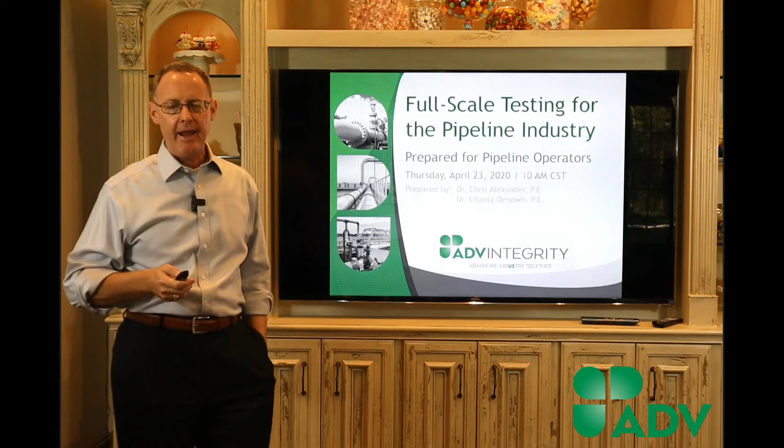We're here to talk about full-scale testing. Here's how we'll run through this: I'm going to open with a few deep thoughts - those of you that know me know I'm a little sarcastic, have to watch that here at home. I'll talk about a concept we have called ICAD and how testing can work with integrity management. We'll spend a lot of time on the goals in testing, really trying to help you understand how testing as an operator can work with you in your integrity management efforts.

Most of you on the call today are operators - that was intentional. We've got a call this afternoon, so today's operator day. Next week we'll probably open it up to a lot of technology companies and have a larger group.

This live stream thing, I'm hoping it's working, because it'll allow us to reach a larger audience. My daughter Ashley, who's at A&M, is manning the booth for us today, and if it wasn't for her we wouldn't be able to do this. Since you all can't come out to Waller and see us, we're having a simulated lab tour, so I've got some photos of what we're doing. We've got guys working today doing testing and repairing samples and those kinds of things.

One of the things I like to do whenever I present is talk about case studies, sometimes we call them war stories. We'll talk a little bit - I've got four of them. I could talk for hours.

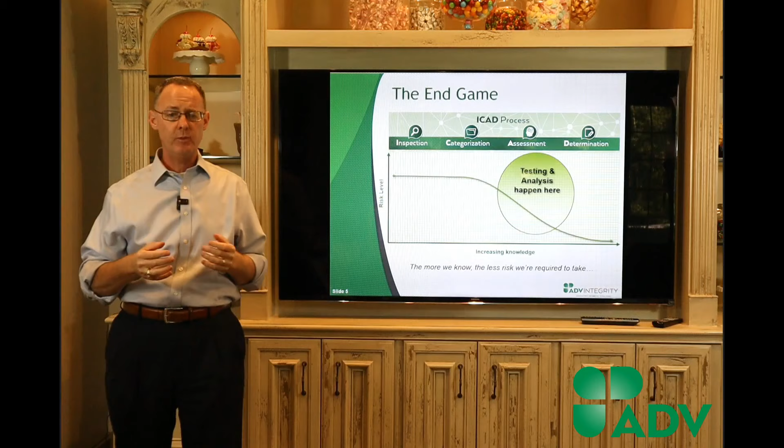So what happens is, you know, you look at my curve, I feel like I'm talking about the weather here, but you look at the trend that goes down, that's the world that we live in. That's the assessment. We have other companies in some sense that we compete with. I want to be Switzerland and get along with everybody, but you've got folks like Ted Anderson, who's certainly the well-recognized fracture mechanics person, Sergio Limon. You've got the modeling side of it, and you do FEA modeling. There's a lot of companies that do that. We even do that. So you can do the modeling side of it. Why we're here today, though, is to talk about the full-scale testing part.

So what happens is, the more I know, if you look at that tagline on the bottom, the more that we know, the less risk we're required to take. So what happens is my knowledge increases with information from models, information from testing. I'm able to take a higher level of risk because I understand more about how that pipe's going to behave. And then I get all the way, so we got ICAD, I'm going through I, C, we've talked about assessment that involves modeling and testing. And at the very end, I determine what I'm going to do.

I've spent most of my life working in the CAD side, okay? And I'm learning a lot more about the I. That's the fun thing about engineering. Even at 51 years old, I feel like I'm still learning like I did when I was a younger engineer.

I just got a little more gray hair to go along with the learning process. But the last part is the determination. And it's not overly complicated because we don't have an infinite number of options available to us.

One of the options we have is we can leave it in service. To a large extent, I think there are a lot of features as an industry that we go out and look at that, if we knew more about how they really were going to perform, we might not even go look at those. One of my goals, and I realize right now with the price of oil hovering around zero, which is unbelievable, I feel like I'm in a bad movie sometimes with a lot of things right now, but we need to be very efficient.

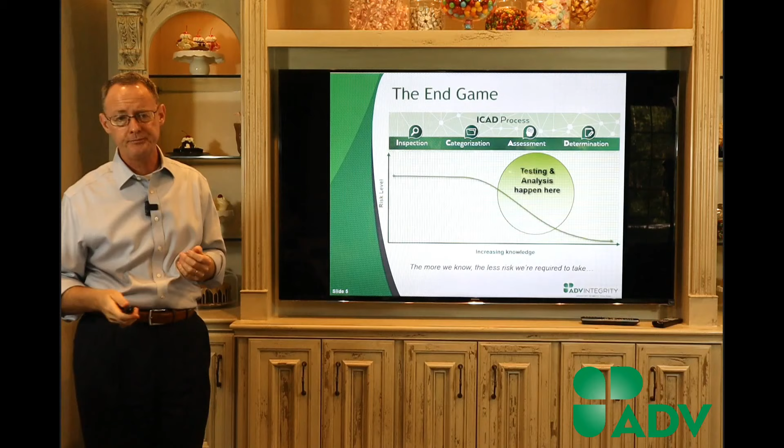We're continuing to do things in terms of leak repair and reinforcing cracks that 10 years ago we weren't even talking about. So we've got a lot of options on this determination side that we can explore, and we're going to talk about some of those today as well. So hopefully no one's fallen asleep yet, it's a little early this morning.

So this is the goal in testing. There's a lot of text on here, okay? And the goal is not just to destructively test things and blow it up. Although I'll admit it's an exciting day to come in, and we blew a couple of samples up yesterday, a lot of energy.

We're going to talk about safety. Safety is a huge thing for all of us. The pipeline industry, we eat, sleep, and breathe safety. It's one thing to operate a pipeline safely, but those of you who've been in our test lab, if you were there when we're doing a destructive test, we spend a lot of time thinking about containment and safety and energy levels in a way that I don't think a lot of the industry really has exposure to.

So I've got two equations, and we'll talk about those here in a minute. The goal in testing is not just to test stuff. And as someone who likes to test, it's easy for me to get excited about it, but I realize I'm not the wheel or the gear, I'm just a cog.

Our goal is to make the models very, very effective. So this last one here, very simply, the goal in testing is to help you more effectively make integrity and operational decisions. So if our models are great, then we can control our risk and we can go do things.

So I kind of made a list, and we'll make this PowerPoint available for you. I know I'm going to follow up with some of you, and we'll talk about these things. As I've kind of been preparing for the past couple of weeks, I thought about what does this process look like? So the first thing that you do, and as operators, this is the world you live in: you run your tools, and you identify that you've got features of interest.

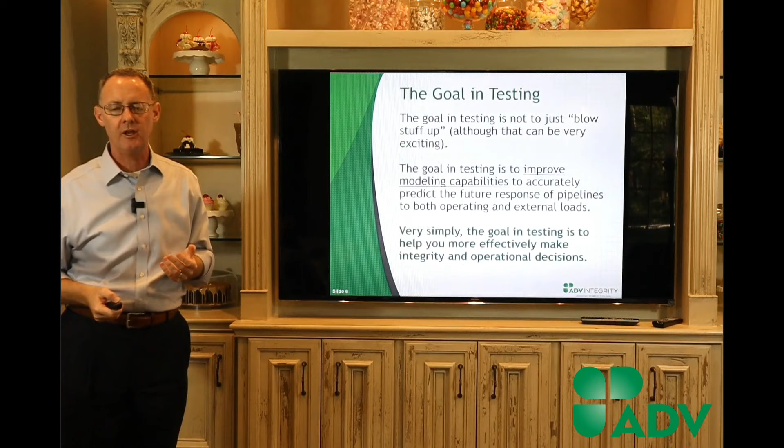So much of our life on the testing side involves a group of engineers and technicians getting together in a room and just running over different scenarios. For a really big test, we spend a lot of time planning things. And this second bullet is super important.

I'll admit, I'm president of ADV, but we've got a team of people that we trust each other. I lean very heavily on Corey Duncan, our lab manager, and Chantz Denowh, our senior engineer, and I really rely on their expertise. Before we do anything, we have a lot of discussion. This second bullet is really where the rubber meets the road.

Then we've got a choice between whether we're going to be creating features—putting a dent in a pipe, an EDM notch to simulate or start a crack—or whether you provide us features that have been removed from the field. That's a big decision. It's very difficult and expensive to get features, and sometimes you don't get what you want.

So we spend a lot of time in the lab simulating and creating defects, and in our case studies you will see that we do a lot of that. Then you've got to figure out what the loads are.

For the most part it's relatively easy to test pipe because we're looking at pressure. But every now and then you get a situation where you need to put on a tension load, or you may need to apply a bending load, and sometimes we have to build frames in order to do those things. Then we design the test program.

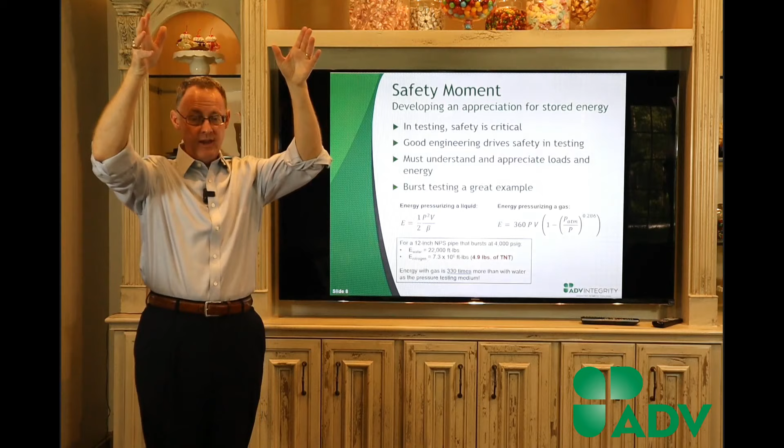It's why when we're lifting things, we don't stand underneath them. Because even if you take 50 pounds and drop it from 20 feet, that's a lot of energy. So that gives you a context of what we're talking about.

Now the reason we're doing this is, what's the difference between liquid and gas? Probably half of you on this call are gas operators and understand the energy associated with a gas pipeline failure. So the equation you have to use for gas, if you remember this from thermodynamics—and most of you probably, like me, have forgotten a lot of it, I was glad to do that, it was not my favorite stuff in school—you run through this and it's the same basic equations. But the reason gas has so much more energy is it's compressible. You know this if you've blown up a balloon or aired a tire. Gas can be compressed in a way that liquid can't.

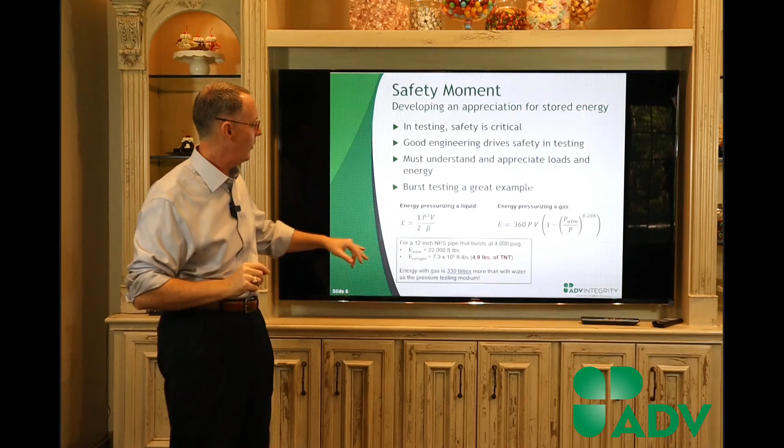So what happens is you keep putting a lot more energy into that, and that energy is stored. For the same basic test we did yesterday, where we were at about 20,000 foot-pounds, if we had done that with gas we would have blown our building up. That's got about 5 pounds of TNT, and I think a pound of TNT is 1.5 million foot-pounds of energy, so it's a little easier to picture. Not that I've ever blown stuff up with TNT, but that gives you some context.

So that's our safety moment.

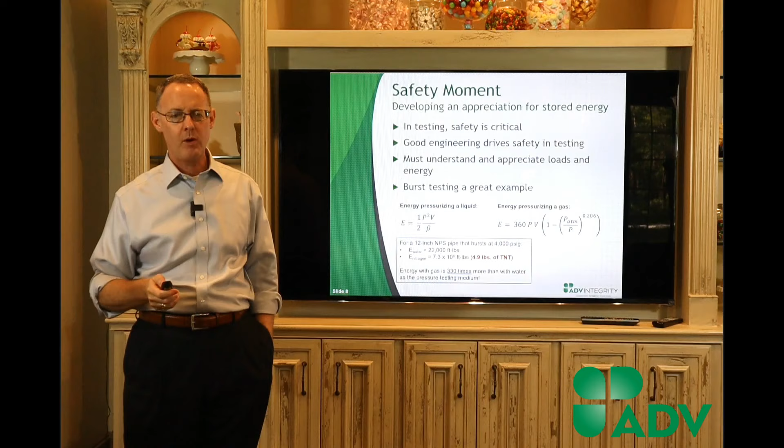A little math—if you got kids at home right now, you're probably having to help them with math homework, and you probably realize our teachers all need to get a raise next year because we're having to do stuff we haven't done in a long time.

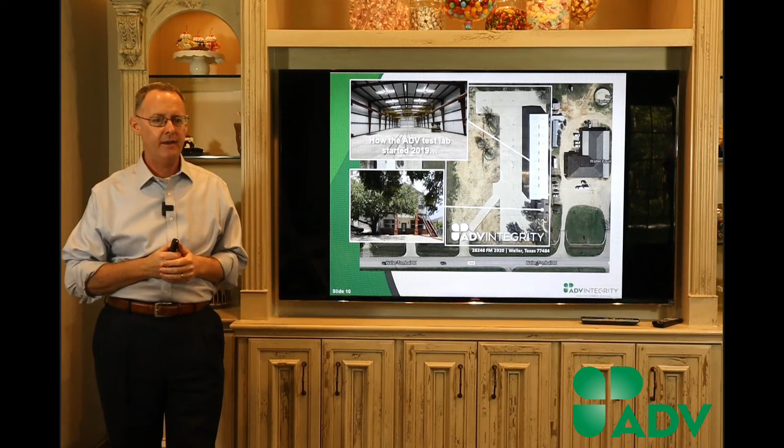Because we can't go to Waller and you can't come out to see us, we're going to do a virtual lab tour. I love some of these photos, and one I really like is this top left one. We leased a building back in October of 2018, and it was kind of Corey and Wendy and I and a technician, then Chantz Denowh and John Rickert came on. So when we started in 2019, this is what it looked like. I don't have a picture of it today.

You'll see some images on the inside—it is completely filled up. We're trying to figure out how we can move things around all the time. For me it's kind of exciting to have started a business and just to see how it's grown, and I think we've had a lot of fun. A lot of you on the call today, you're the reason we've been able to grow this business.

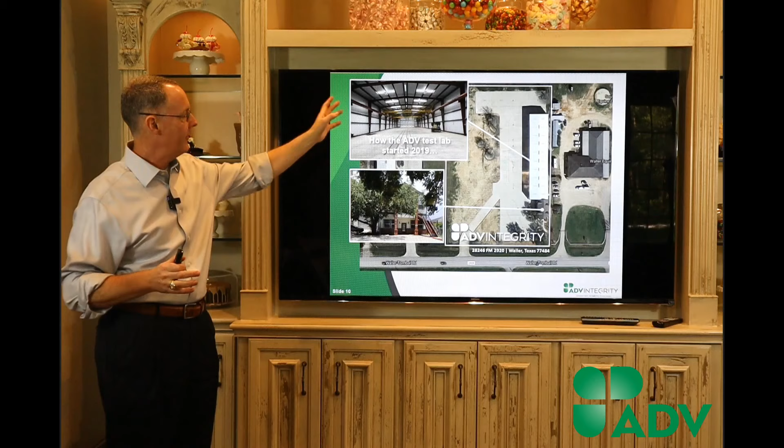We've got about 4 acres—I think I got this off Google Earth, and you can see we've got a lot of area. Back in the back, Rosen has loaned us their pull rig, so we've been working on a project pulling some things. We've got a grassy area where we can bury things; we did a project for TC Energy where we buried some composite samples in the ground. We've got room to do stuff, and when you're doing testing you really need room—you can't just do things in a small office building. So it served its purpose well.

One of the first things we had to do, since we're doing pressure testing, was figure out where we were going to do these things. When we moved into our building, there was an area inside where we looked at possibly putting some pits in. Those of you who've been around a while know you've got a couple of options: you either contain it above ground or in the ground. After some debate, we decided it was better to build an above-ground bunker. So this is our box, our containment box.

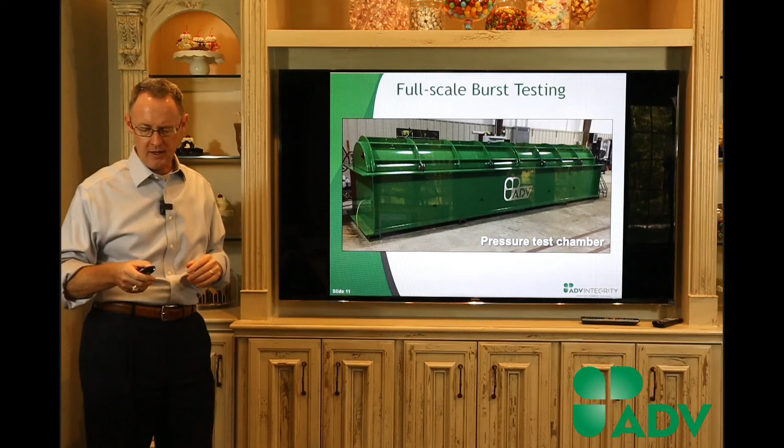We basically pressurize. I think the largest sample we've done is 36-inch diameter, about 25 feet long. So we've got the capacity to do this. If we need to get into longer samples, we can build a bigger box. But for the vast majority of what we've done, we've been able to do it. We've had some pretty high energy levels in there, and we spent a lot of time running calculations. Corey Duncan did a great job designing this, and it's worked very well for us.

One of the other things I talked about earlier, the vast majority of what we do, probably 90 to 95%, just involves pressure. So we're pressurizing samples, we're pressure cycling, but on occasion we're asked about putting external loads. We've got a project right now with PRCI looking at large standoff magnetometry. We're going to build a facility outside that's about 120 feet long, and we're going to displace the pipe to simulate land movement so the LSM technology can go over the pipe and look for displacements and stresses.

So we had two projects early last year where the operator said, look, we need to put some bending loads. One was looking at girth welds, another was looking at wrinkle bends. So in our world, we're starting with a blank whiteboard, and we're like, okay, let's design and build a load frame. Corey and Chantz are primarily the brains behind this, and basically we have an I-beam.

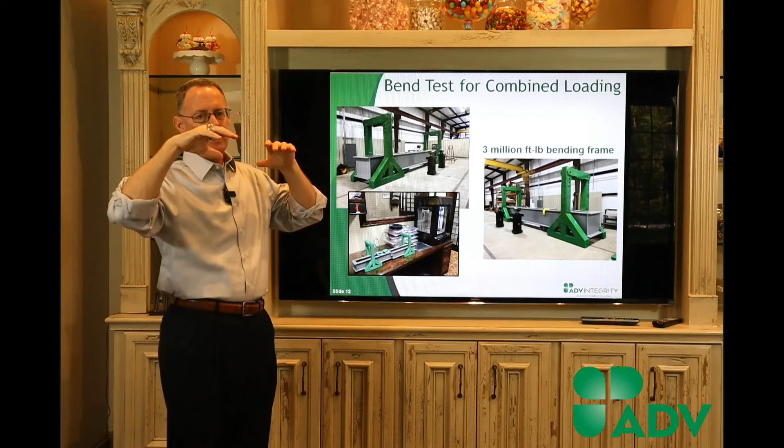I love Corey's design because we've got two I-beams, and we drop the cylinders in the middle. What happens is it keeps the sample relatively low. A lot of the work I did before in other places, you lift the sample way high in the air, and it's more of a safety hazard. So I like Corey's design. You load the sample in between these two cylinders. These cylinders will do about 460,000 pounds each.

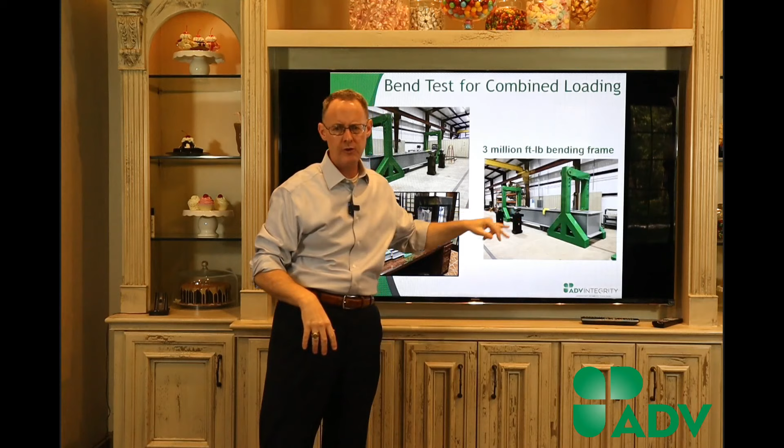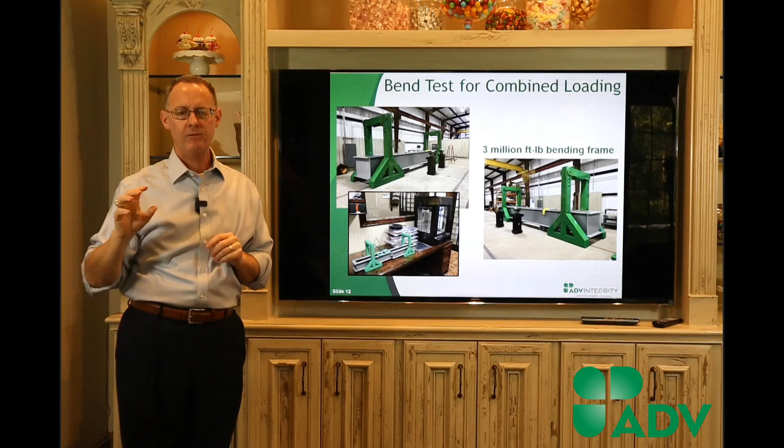We displace it. Chantz wrote a little algorithm. We can actually do fatigue loading. So if you've got a situation where you're concerned about the pipe moving back and forth, Chantz and our technicians have got a program where we can simulate that displacement. A lot of times it's a little bit more money to look at fatigue, but the benefits you get looking long term are extremely valuable.

I had to stick this photo in here. I'm kind of a kid at heart, I love toys, and we've got a 3D printer, and a couple of our guys have gotten really good at using it. So Corey 3D printed a model of our load frame. Once we get out of the house and go to shows, we'll bring that with us. It's kind of hard to load this thing up in the back of a pickup truck, but we can take the model with us and people can see it.

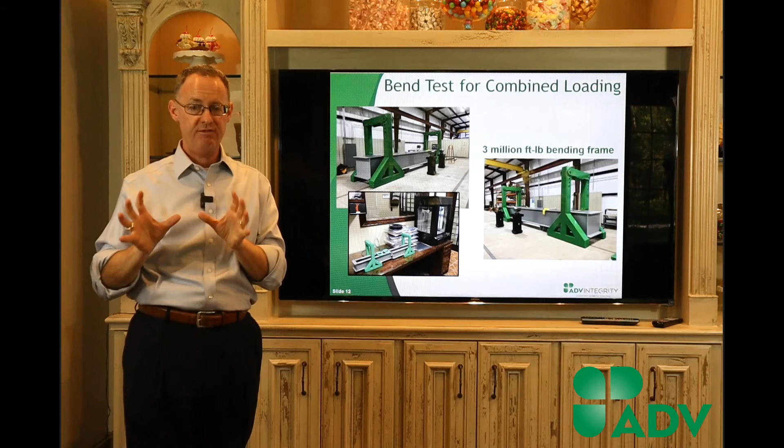The other thing about the 3D printer, a little plug for where I see things going. Atul Ganpatye started with us - I feel like he's been with us for a couple of years, but he started in February. There's an area called additive manufacturing where we're as an industry really looking at manufacturing pieces using a 3D printing process, doing it with metals. I'm really excited, that's kind of a forward-thinking concept that we're looking at.

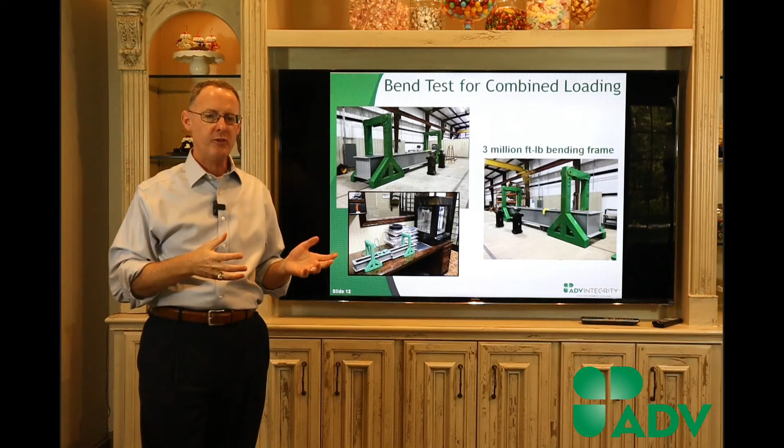The other thing I like is sometimes in the lab you need to build a little bracket to hold this or that. Historically, you'd go out and bend some steel or make it out of wood. Now the guys just design it in SolidWorks, fire it into the 3D printer, and print it out. It's got threads in it. So I've been really impressed with how our engineers and technicians have been able to use that 3D printer to basically make things that we use in the lab.

So one of the things that we've done, we did a project earlier this year, and I want you to think about this for a minute: minus 51 degrees Fahrenheit. That is really cold. We live here in Houston, and when it gets much below about 60, I start getting cold. So when you get to minus 51, that's really cold.

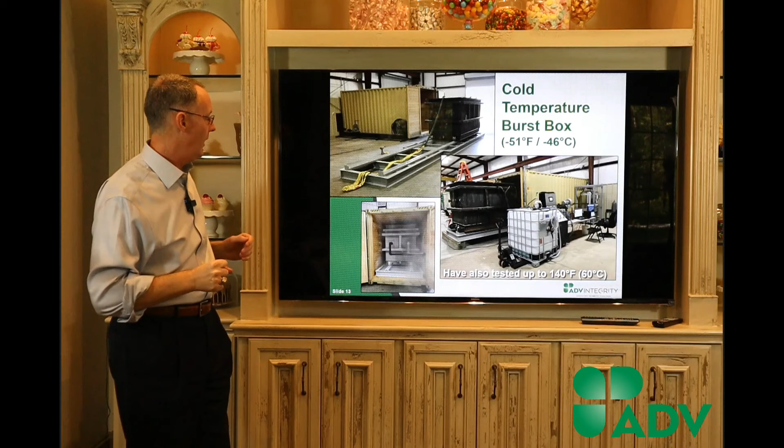We needed to do a pressure test, so Corey designed for us a box, and he and Chantz got together and figured out how to build this box to cool it down. I took a photo as we were opening a box. We basically insulated a Conex container. This box here does all the structural reinforcement. We slide it out, it's on rails, and we load the sample in there.

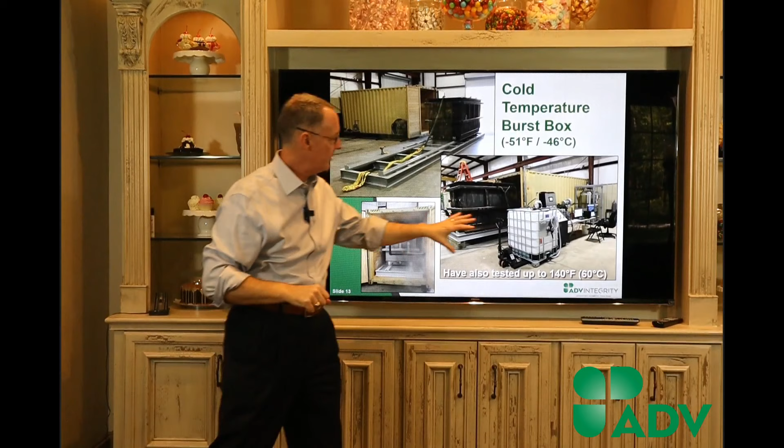We've got a box that has a lid, we bolt the lid down, we slide everything in. And then all of this equipment here, okay, liquid nitrogen, we've got a large tank, we start cooling samples down. I was really impressed with how everything came together.

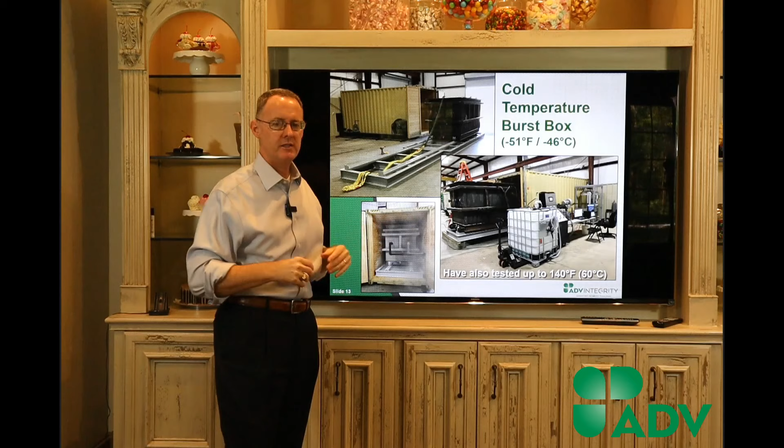I talked about earlier safety. One of the things we do when we design structures for containment, we want to make sure they can withstand the energy levels. And as you can see, it's a big box. It has the capacity to absorb a lot of energy, and then we have the ability to slide this thing in there and cool it.

We've also run some elevated temperature tests. I've got a little note here, we test a composite up to 60 C, so we got a pretty wide range. We can go higher than that, but most of the reason we're doing any elevated temperature work is to focus on the composite repair technology. So that kind of gives you an idea of our overall capacity.

One of the things I've enjoyed doing, those of you that know me know I love joint industry programs. I kind of keep a running tally, I think I've done about 20 JIPs. The very first one I did was back about 15 years ago on my PhD, and we get a lot of industry leaders and thought leaders together, and we get technology companies.

The next slide I'll show you kind of what it looks like. We started this project around December of 2018. Had a meeting here in Houston, got a group of people together, kind of framed out what the test program was going to be, and it's been wildly successful. I was hoping that we'd have 3 or 4 operators and 3 or 4 manufacturers. I think last count we had 6 operators and 8 technology companies. It's really grown, we've really learned a lot. Earlier this week we were doing some burst tests, and things are looking really good for these technologies.

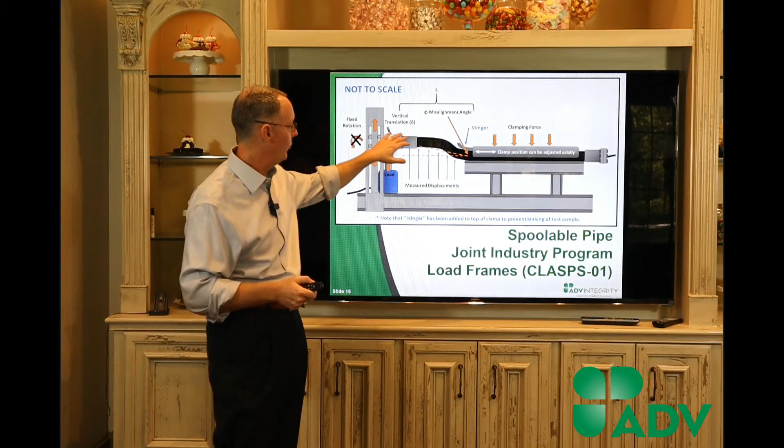This is kind of a little schematic of what our system looks like. We take the spoolable pipe and displace it vertically, putting a bending moment on this connector section. We basically pressurize them for 1,000 hours, do 100,000 pressure cycles, and then if they survive, we'll do a burst test.

This is information that we've actually presented at the API 15S meeting. If you're interested in learning more about this, please reach out to me, and we'd be glad to visit with you. But as I said, it's a great example of industry working together.

The power of JIPs is a couple things. One is you get a lot of good thought leaders within the technology companies and the operators, and when you get a lot of really smart people, you're going to come up with some really good concepts. Now, I will admit, as someone who's organized a lot of JIPs, it's challenging at times to manage them because you've got a lot of smart people, and smart people have opinions. We certainly know today there's lots of opinions floating around. Well, engineers also have opinions. So there's some psychology involved in us all figuring out how to work together.

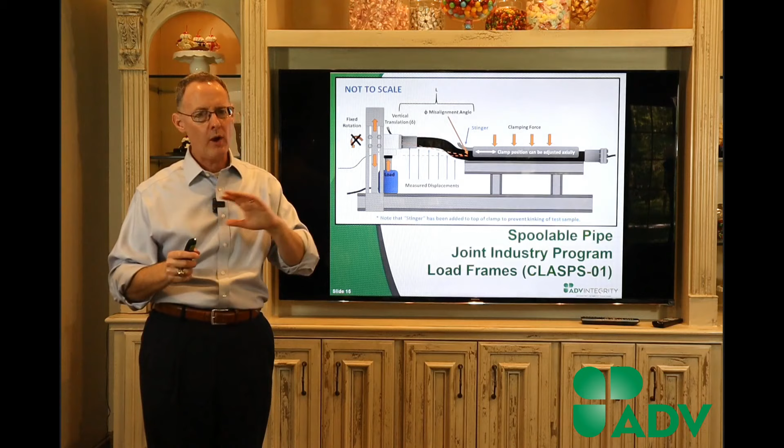It's a great opportunity for technology companies to showcase their technologies and demonstrate what they can do. With the price of oil where it is, we're going to be very cost conscious. So you can come into a problem or challenge with only $50,000. You call us, we work with you, we go out to industry, and that $50,000 can become a $500,000 JIP. I think even folks on Wall Street would like that kind of return on investment. It's a great way to solve challenging problems in an economic fashion.

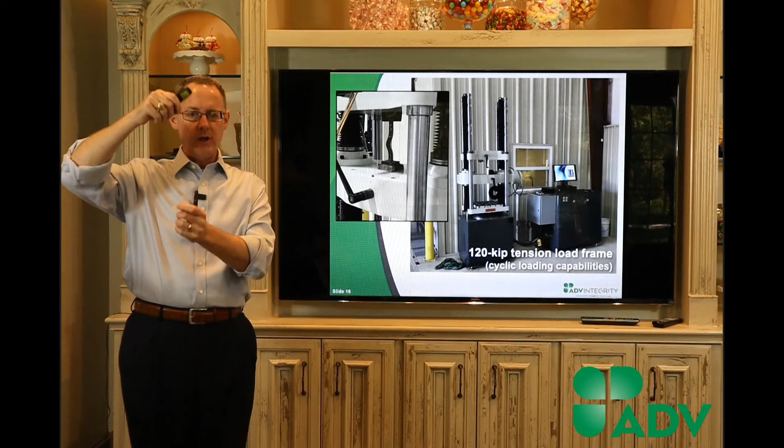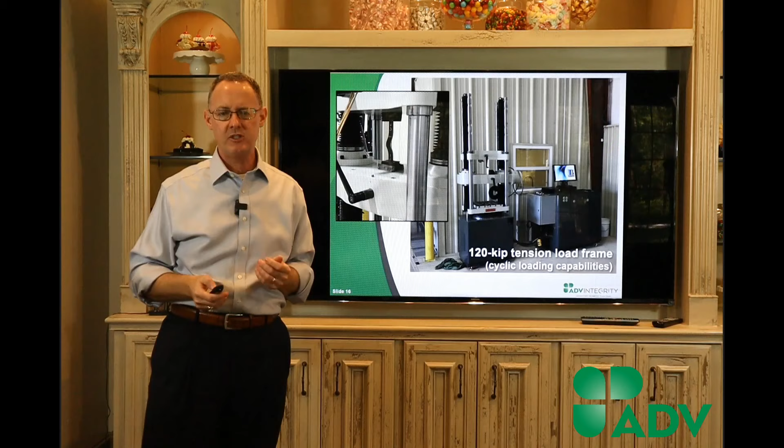One of the other things we did, and I'll admit when we started in 2019 I did not think we would do this, but we bought a little Tinius Olsen machine. It'll do about 120,000 pounds and it will do cyclic loading. This year I want to do work with a company doing composite work, to do some fatigue testing on composite materials. It's relatively automated, but we can also do tensile samples. This is actually a wrinkle bend where we're doing some high strain, low cycle wrinkle bend testing that has worked out really well. That's just an example of the kind of things we can do. The nice thing is if we need to do a quick pull test, we've got the facility to do it and don't have to wait to send it out.

One of the first areas I got involved in the oil industry in 1993 was looking at dents. I'll admit, when I was at A&M, I had no idea what a big problem dents were in the pipeline industry. There's a lot of work, some great work that's been done by PRCI looking at dents. It's a big part of our industry. Everybody has dents. How do you assess them?

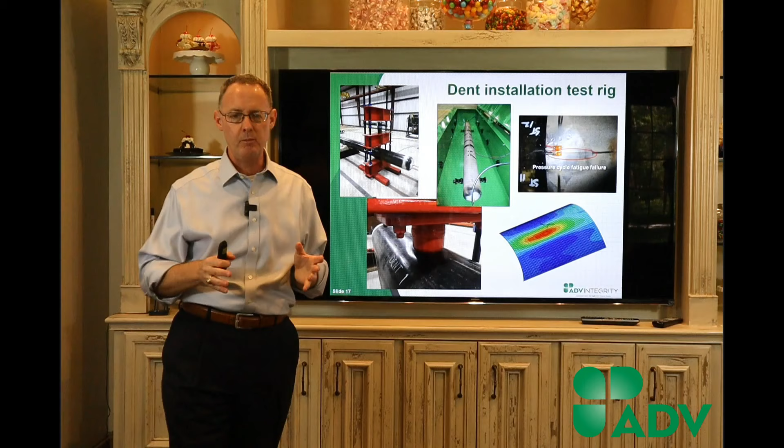So we've got a little rig. This is the small dent frame, and we have a large dent frame. We can dent pipe up to 36 inches. And we basically put a dent in.

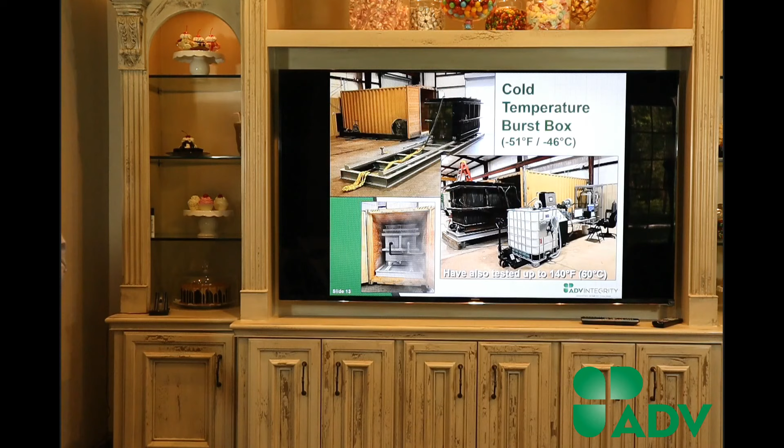Okay, here we go. So I was talking about dents. We've done a lot of dents over the years and we've learned a lot, but the interesting thing is we're continuing to learn more. We'll put a strain gauge on it and measure the strain. This is actually a fatigue failure that we get. If you know anything about dents, plain dents, the reason it fails is due to fatigue and cycling. If we were to do a burst test on it, the first thing that happens is we basically just pop that dent out. So we're going to continue to do more. What makes dents often damaging is the interaction with mechanical damage.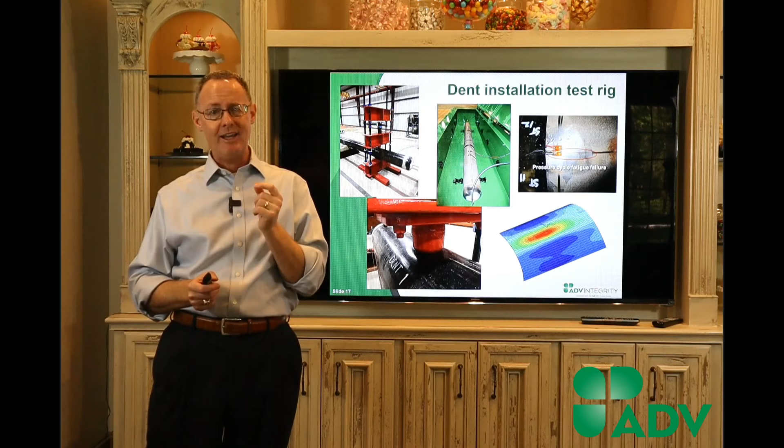Sometimes we just build things. We'll take an LVDT and hook it up, and it allows us to measure displacement or rotation. There's a lot of creativity that goes into that.

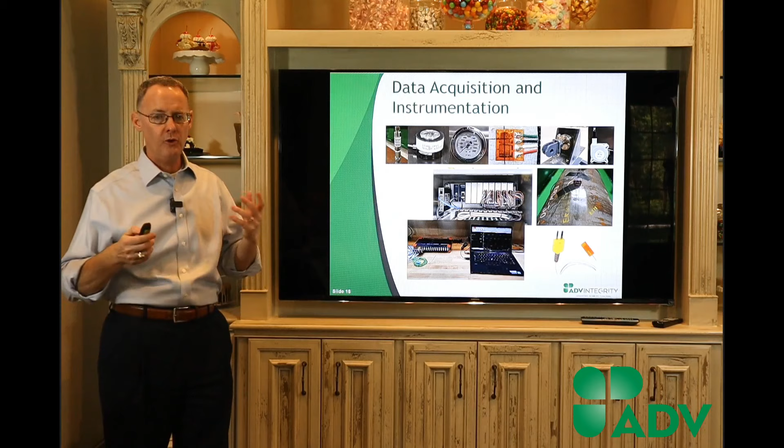If you have a mechanical engineering degree, odds are you had some kind of controls class. I've been really impressed with our guys learning how to do controls and being able to not only collect the data, but sometimes use that information to control pumps and load cylinders and those kind of things.

One of the things we figured out - we had strain gauges around the pipe, and we were pressurizing it. It's not rocket science, it's PR over T, the hoop stress. But we had gauges all the way around, and we were getting some really weird readings - like at 90 degrees the strain was different here. If you're doing anything with large diameter pipe, it always has some level of ovality in it.

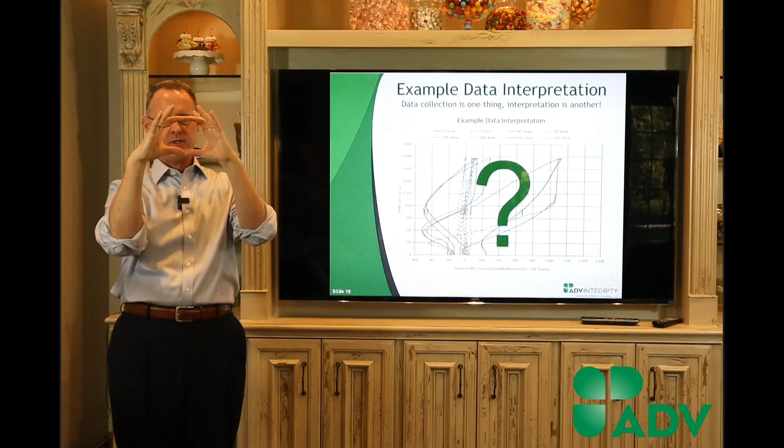So what happens when you've got ovality, when you're pressurizing - and I'm exaggerating a little bit here with my hands - you create an ellipse, and as you pressurize it, the strain changes around the circumference of the pipe. So we spent a couple of hours, and then eventually a couple of weeks processing through it to the point where we felt like we understood what was going on. So it's not just collecting data - sometimes there's a real challenge in knowing what to do with the data once you collect it.

Okay, so let's run through some case studies. We're about 39 minutes here. Case studies are extremely powerful in terms of telling the story.

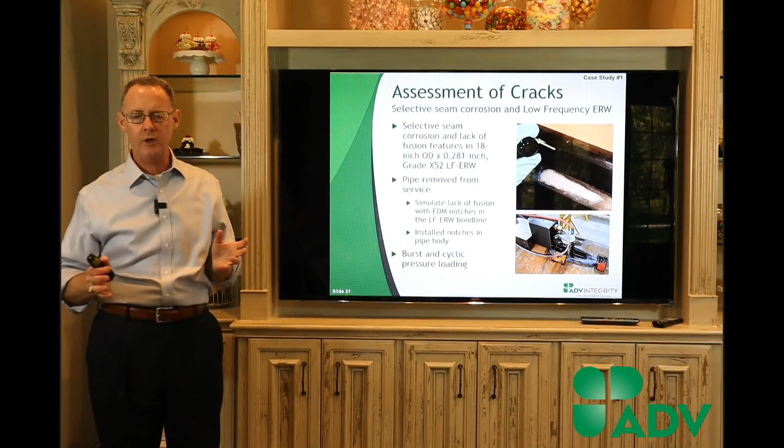One of the areas getting a lot of emphasis right now is cracks - crack management. Our ILI tools are finding things, and they're seeing cracks that 20 years ago we didn't even know were there. So the problem is once you find them, you've got to do something about it. There's a lot of interest in looking at the performance, but also a lot of interest in looking at the inspection technologies. So this is a project that we did.

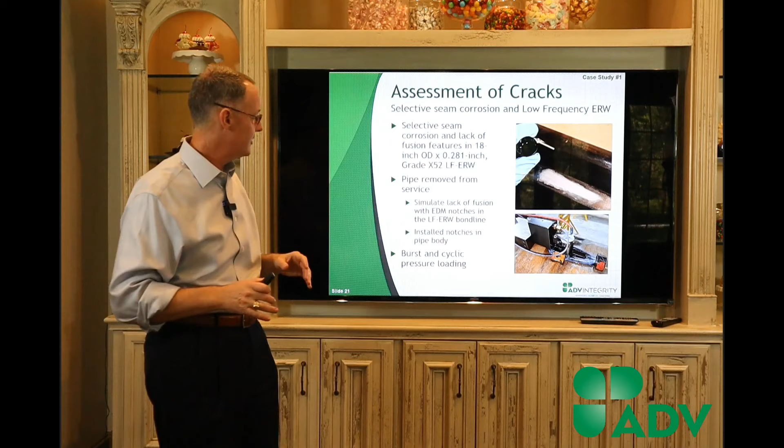An area of great interest right now is low frequency ERW pipe. So we put some EDM notches in - this is an EDM notch installer. There's a little electrode that goes down into the pipe and basically creates a notch. Doesn't sound very complicated, but it's an extremely detailed process. You've got to be spot on for a couple reasons.

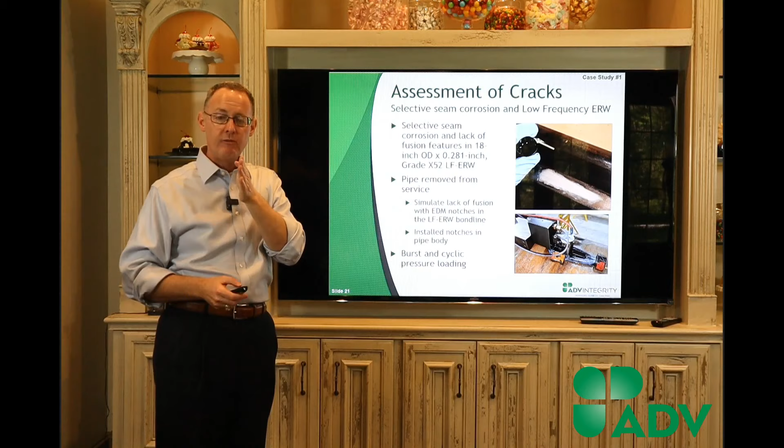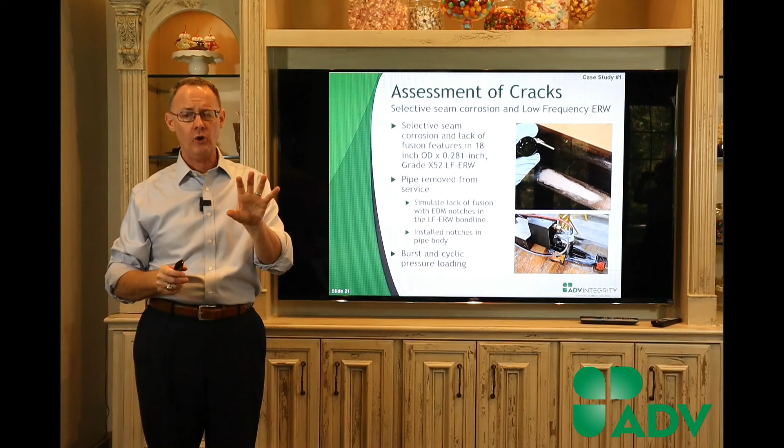One is what you notice - we've etched this surface here, and you can see this little white line. We're looking for an area where the ERW seam comes together. You've got to install that notch right in the middle of that. So we are mechanical engineers, we're learning a lot about metallurgy, and it's very important as we go through that process that we make sure we've got that information before we start putting notches in pipe.

And these are just some tests. What you can see here on the bottom right is there was a notch, and we cycled it to create a crack at the base of that notch. I'll admit, when I first started doing a lot of this work 6-7 years ago, I didn't fully appreciate this. I remember Ted Anderson and I having a little discussion about that time - he's like, look Chris, notches are not cracks.

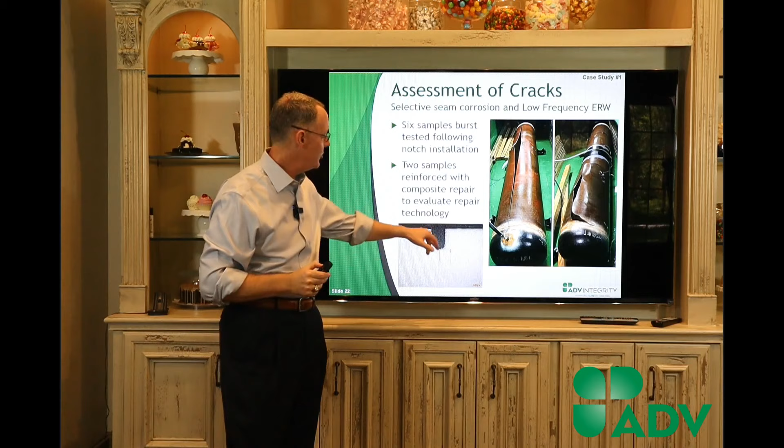When you section this - when you send the electrode in there, this thing is like 10 thousandths of an inch wide, it's very, very narrow. We try to make it relatively sharp at the bottom, but you push it in, and then you take a cross section of it, put it under a microscope, and that is not sharp at all. But when you cycle it, what you notice is we get that crack. That crack is sharp. So now if we did a burst test, okay, we're really testing a crack.

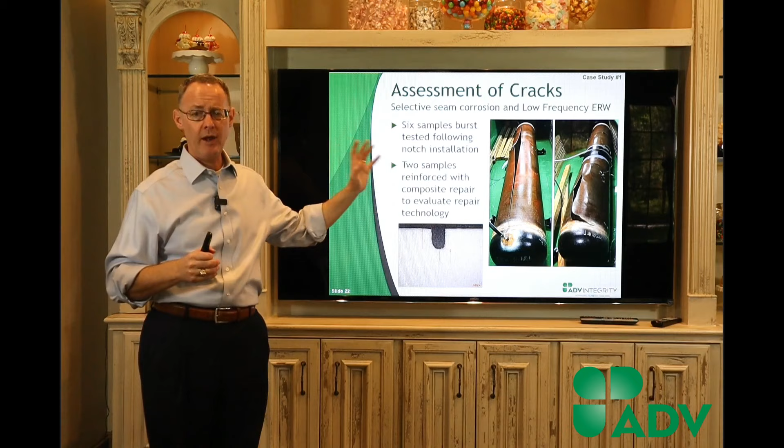So what you can see in these samples is a couple things. One is the left image, you can see the fracture. If I show this picture to you, and you've been in the pipeline industry any length of time, and I asked why it failed that way, your response would be because it's in a low frequency ERW seam. And that's exactly what happened. We had a notch, we pressurized it, and it ran the whole length of the pipe. If we tested with gas, it would have run all the way through the end caps. So when pipelines fail under high pressure, this is what potentially happens in a low frequency ERW seam if you get a fracture to run.

On the right side, we tested a composite system - this is actually Milliken or CSNRI's Atlas carbon epoxy technology. We've tested it a lot, reinforcing cracks with extremely good results. We had the same defect there, and what you notice is the fracture initiated outside the notch crack that we had created. Just a great example of how we're able to take real pipe - this is pipe probably from the mid-1950s - put an EDM notch in it, do some pre-cycling to get cracking, and then test it to simulate what's going to happen.

So the beauty of this is it went into this operator's integrity management program, and they had confidence in understanding how the feature geometry, in terms of length and depth, affected the pressure capacity of their pipeline.

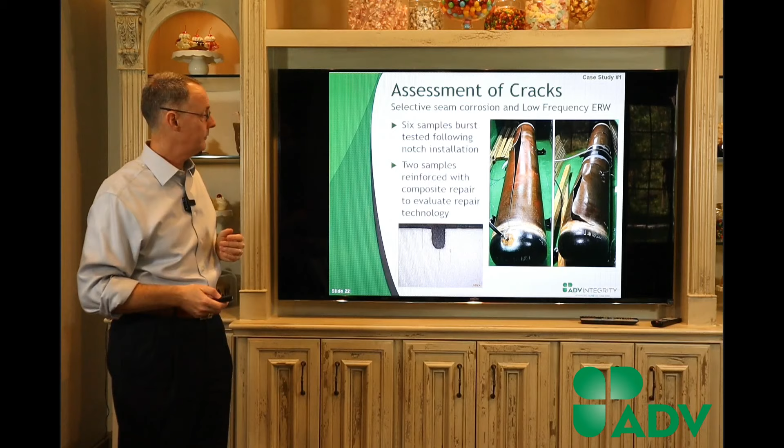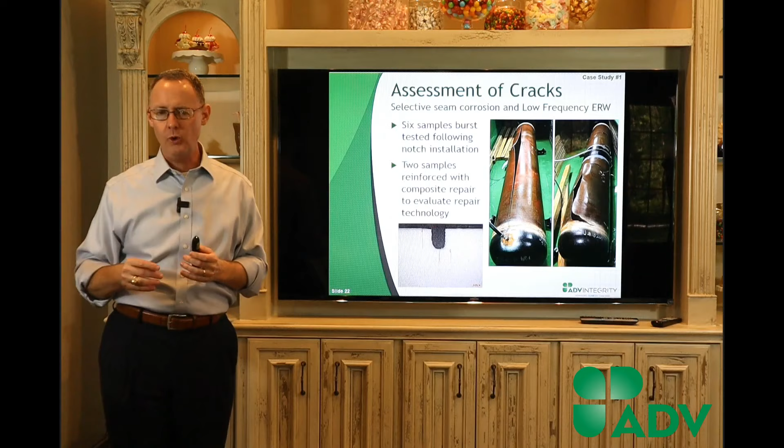In general, what I've seen - and as engineers, we tend to be conservative, which is a good thing. It's the reason wings don't fall off airplanes and wheels don't come off cars. We tend to be very safety conscious. When in doubt, one of my favorite sayings in the oil industry is, when in doubt, make it stout using something you know about. I heard that from an old metallurgist years ago, and it's a great philosophy, but sometimes it's possible to be a little bit overly conservative.

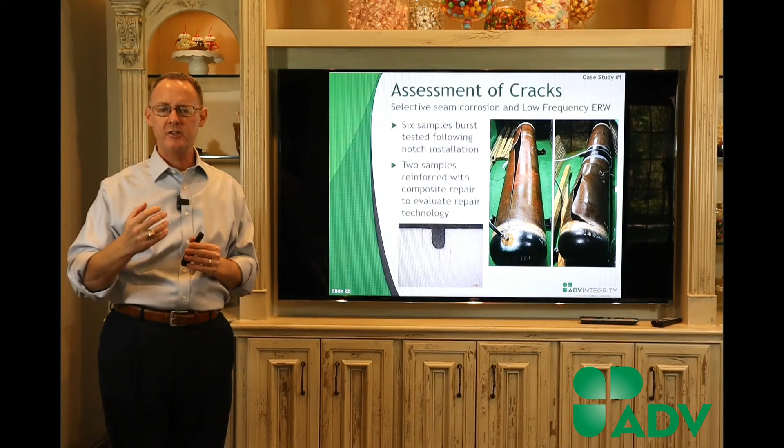So that's the whole gist of this program we're talking about today. Let's make sure we're being safe, but let's make sure we're doing that based on some scientific rigor as much as we can.

One of the other things we're doing - I mentioned earlier we're not only testing pipe, but also looking at technologies. We're looking at computed tomography. There's a couple of companies that do this. Probably one company that has taken the lead, at least in the pipeline industry, is Inspection Associates, also co-owned by Sonomatic. James Medford has developed a technology, and this CT technology actually goes around the pipe and creates a three-dimensional image of crack-like features.

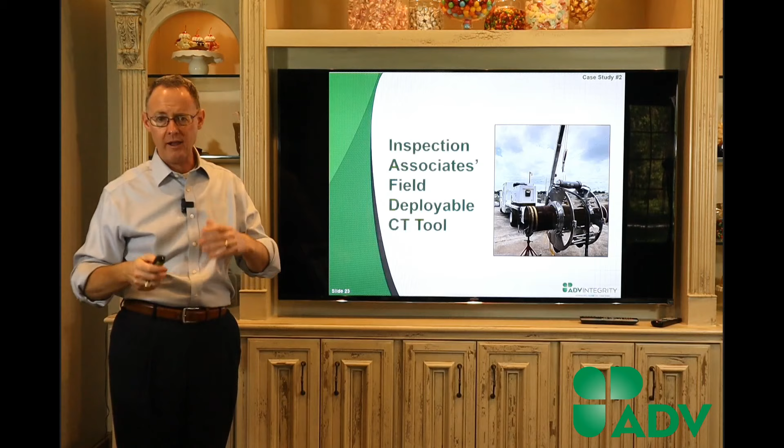So we did a little project for him. We took some 12-inch pipe, put some EDM notches ranging from 10 to 40%, did some pressure cycling to create cracking, and then sent it back over to James and let him make some inspections. We got his data back, broke all of these features open, and did a side-by-side comparison. If you're really interested, the last slide will have my email address - shoot me an email, and we've got a paper we presented back in February where we talked about this program. There's a lot of data in there that gives you an idea of how this technology works.

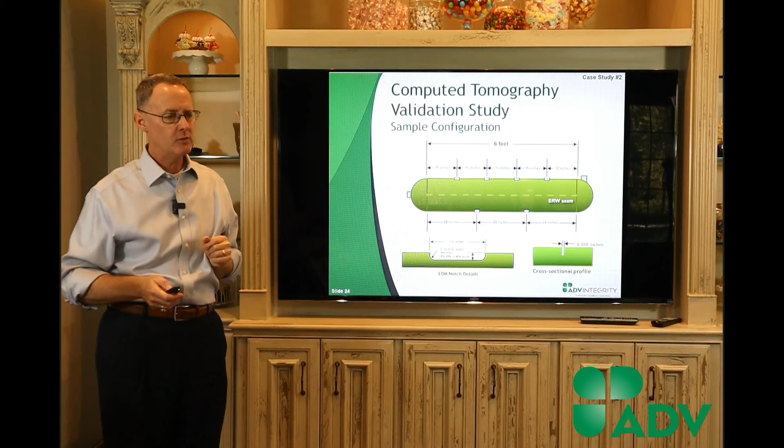PHMSA and PRCI are also sponsoring a project - it's the NDE-2-11 project, and we're creating a lot of features and going to be doing a lot of inspection work. I think it's great to see the industry moving the ball forward as we look at advancing these inspection technologies. So what we did was put weldable strain gauges across the notch, and that allows us to monitor the crack opening up.

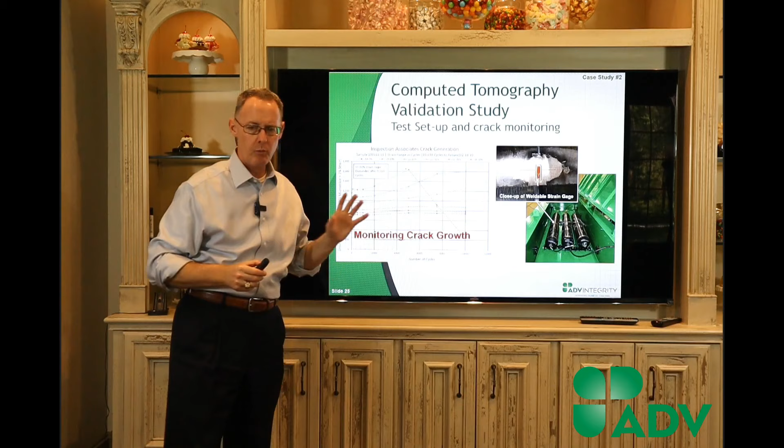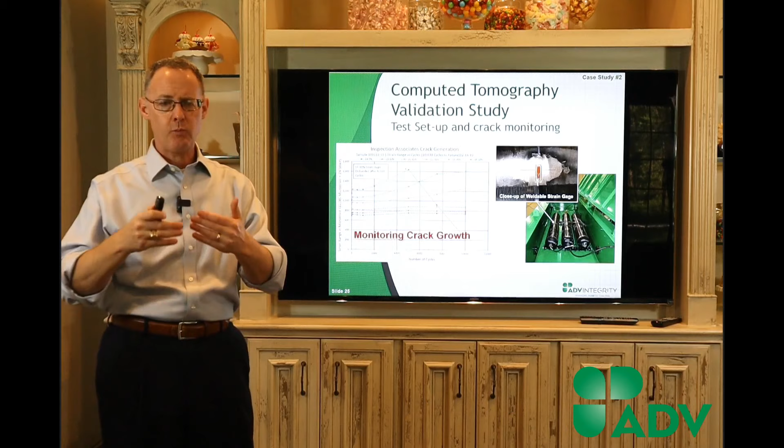And as it opens up, what you see is the compliance in that notch changes and the strain really starts going up. So we did a project with James Medford working on this. We did a big project for Rosen that we also presented a paper at PPIM. We developed some expertise on this in terms of really determining when do you stop, and we've got other things we're working on to help us understand how far the crack's propagating. I think there's a lot of opportunities we have as an industry to advance this.

You can see in our green box, we've got the samples there, and we'll pressure cycle, and then we stop at a certain point.

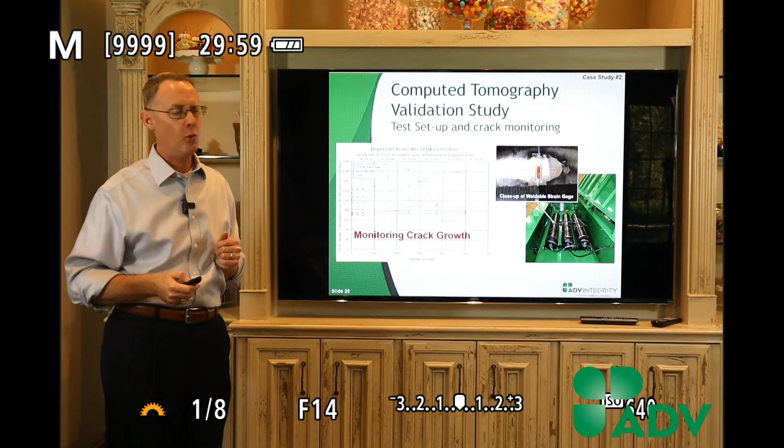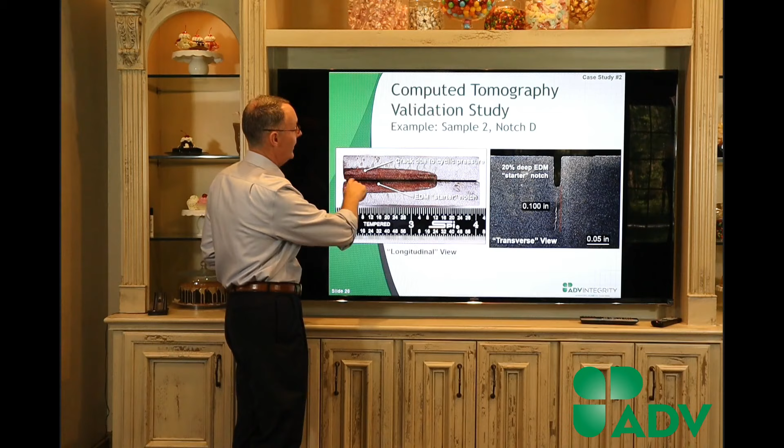So once you do all the cycling and the inspection work, then really the fun starts. We basically open these up. If you look right here, and those of you live streaming this can see us, visualize my finger looking at the notch area. The notch is relatively straight as it goes across there. Then as you cycle, and if you've done any fracture mechanics work, we always assume the fracture has an elliptical shape. This is a textbook example of what that fracture looks like. These are two mating surfaces that are broken open.

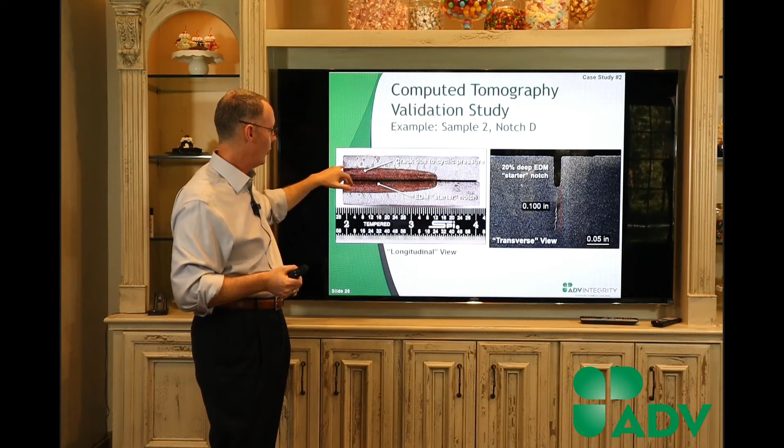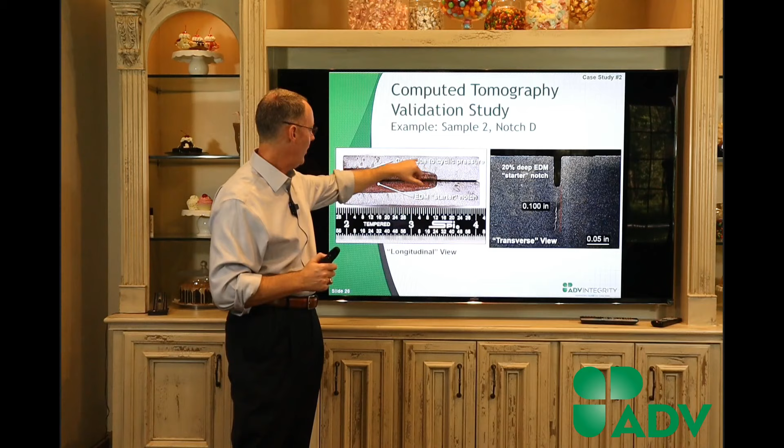And as we cycled, it grew. We obviously stopped it so that James would be able to make the inspection work. So we break it apart. If we had continued cycling, that rusty area would have gone all the way through, and we would have had a through-wall defect develop.

On the right side, you can see what I'm calling the transverse view, and that section is looking down the axis of the pipe. You can see the EDM notch and how much our crack grew in that process. These are basically the same image — we just split the notch in half, and in one of them we broke it apart, and in the other we looked down the axis of the pipe.

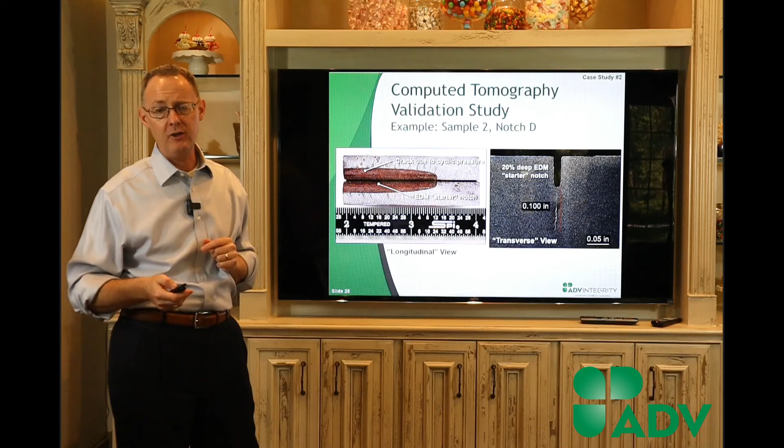So I like that we're doing this. We may not be the only people who invented this, but when we first started breaking these notches open, it seemed a waste to have to break the whole thing open. By sectioning it, we're able to get two different views, which give us two pieces of information about the notches. John Rickert, one of our young engineers, has really done a good job learning how to do this, and it's been very, very valuable for us.

These are the images on the right that we get from James. He's running his inspection technology called computed tomography, and you can Google it — it's used in other industries, but for the pipeline industry it's got a lot of promise because of the accuracy you're able to get. What we have looked at is hook cracks, which don't just run radially, they actually curve away from a radial plane, and it's practically impossible to get that with conventional NDE technologies. With computed tomography, because you get a three-dimensional image, you can see that kind of morphology of the crack. So we're just doing a side-by-side comparison.

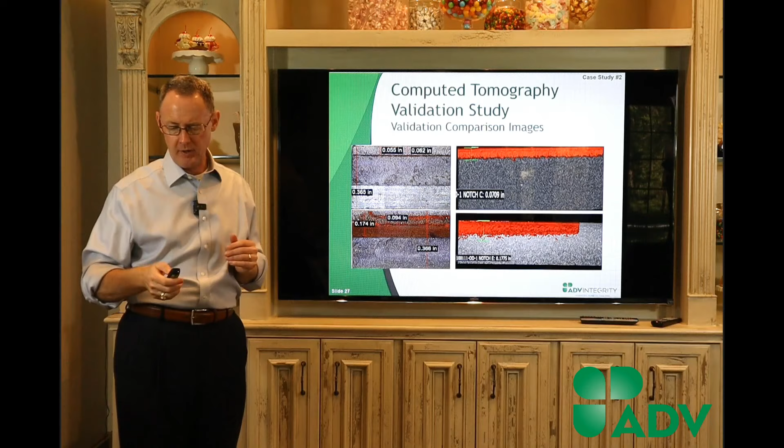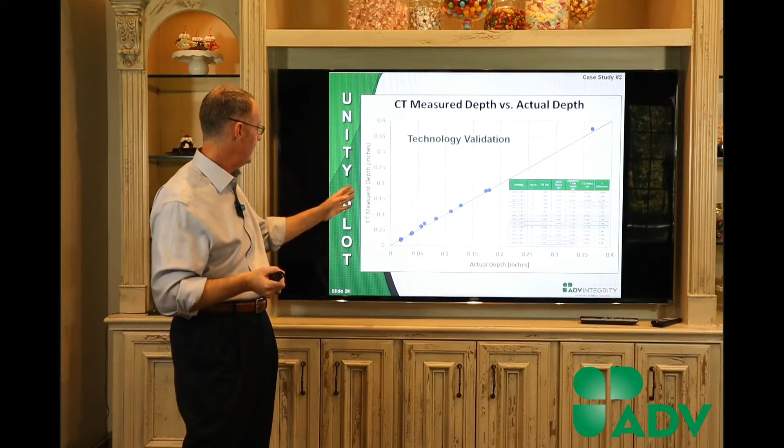It's kind of like Consumer Reports — we're comparing all the data. What you notice here in this plot is the actual depth, which is what we measured once we cracked it open, compared to the CT measured value. A perfect set of data lines right on top of that line. I could have put error bars and those kind of things on it, but my observation, based on a very simplistic view of the presentation of the data, is it's worked very well. There's a lot of good accuracy that we're seeing with that data.

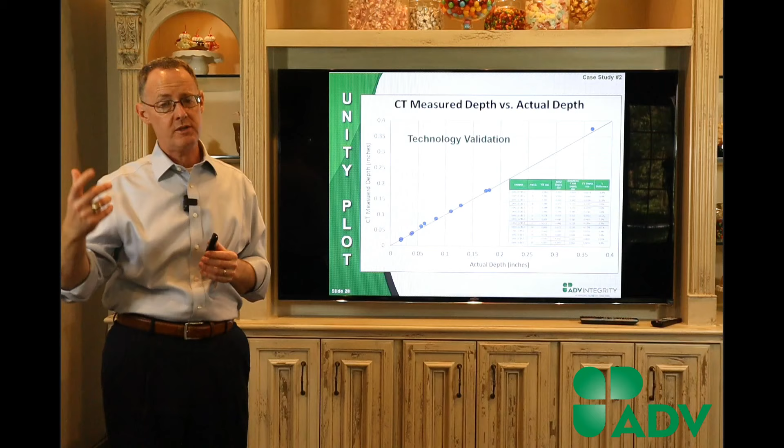I think in the PRCI project, we're probably going to be looking at in excess of 90 features. The more data we get, the better we're going to find out. What I found, without going into a lot of depth, is the accuracy is higher on the more severe features, and I think that's probably the case for most NDE technologies.

So this is case study 3 of 4. This is some recent work that we've done with TC Energy, and we are going to have a paper at the International Pipeline Conference. I'm really hoping that we get to have it, hoping our leaders running IPC, Pat Veith and some of the other gentlemen and ladies... it's a challenging time trying to figure out forecasting September, October, what we're able to do. But this is a paper that will either be presented in person or we'll be doing it online.

This paper talks about a study we did with TC Energy looking at repairing severe corrosion and leak defects. It was a great study, and we'll be presenting this information. I'm really excited to see how we're pushing technologies, and this is a good example of that.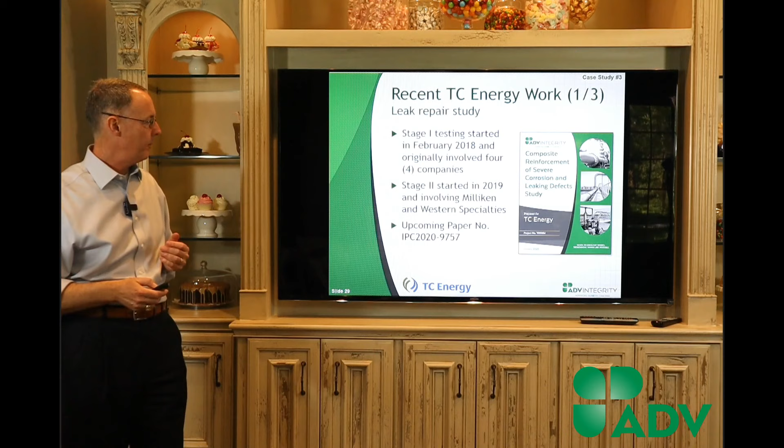I don't have a lot of detail, I have kind of the major categories. So we took very thin wall pipe, 0.157 inch, about 4 millimeter if you use SI units, which most of the world does except for Americans - we're stuck in our English units.

And we created 85% corrosion features in it by machining. To be honest, I was really impressed that our machine shop could even do it - it's very challenging to get that kind of accuracy. So if you think about it, we've got 15% of a 0.157-inch wall, very, very thin.

Some of those we drilled holes in. We did nitrogen gas testing for 90 days, and some elevated temperature testing just to simulate how these composite systems would perform. The Canadians run to a higher pressure than we do for the most part, so they run up to 80%. So we really pushed the limit on these technologies.

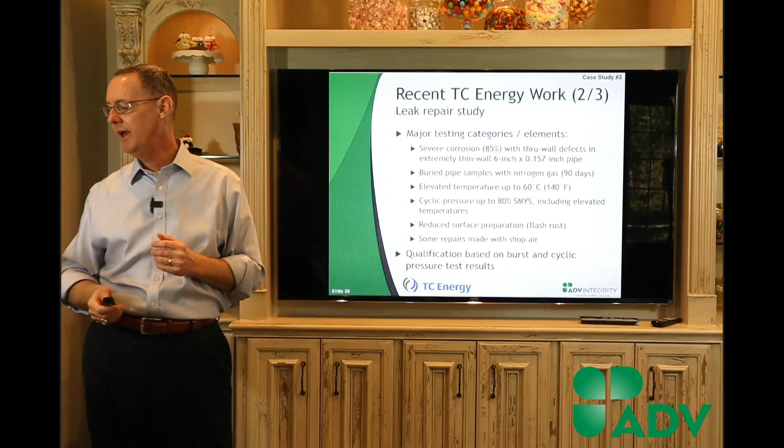We also looked at flash rust and not having ideal surface prep, and we did burst testing and cyclic testing. These are just a couple of images - this is the buried pipe in the ground before we put the soil back on, and these are just some schematics.

We had two companies that participated that we'll talk about in the paper. One was Western Specialties Composite Sleeve, which is a steel half shell that's glued on the pipe. I've tested that technology for probably over 10 years and have always gotten extremely good results. It's an alternative to welding - you're adhesively bonding that steel sleeve. It does real well in leak repair because as that corrosion wants to bulge out, you've got steel pushing it down.

The other technology we looked at, and it seems like we're running a lot of tests with these two companies, is CSNRI's Milliken Atlas carbon epoxy system. I talked about it earlier - it's been very successful in crack reinforcement, and both those technologies did very well in this program. So I'm very optimistic, very bullish about the future of using these kinds of technologies to really push the limit for us.

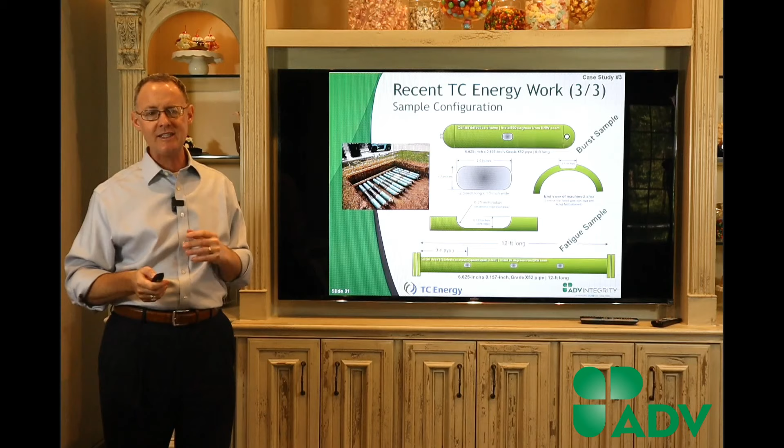And the last one, because I don't have a lot of time, is a PRCI project that we did - very, very large project, large in terms of scale, large in terms of scope. David Zhu with PG&E is kind of the godfather in this, I actually think he's on the call this morning.

The idea is looking at these pressure isolation technologies, running them down through the pipe, remotely setting them. Just envision you've got an area that you need to repair - you run these tools and you set one here and one here, and they lock in place, and you're able to have high pressure on each side, and in the middle you can bleed off the pressure.

So it's also like a freeze plug - a very high-tech freeze plug - and it allows you to possibly replace that section. Maybe you're working on a valve. So it's really neat technology. One of the concerns, these are used offshore a lot.

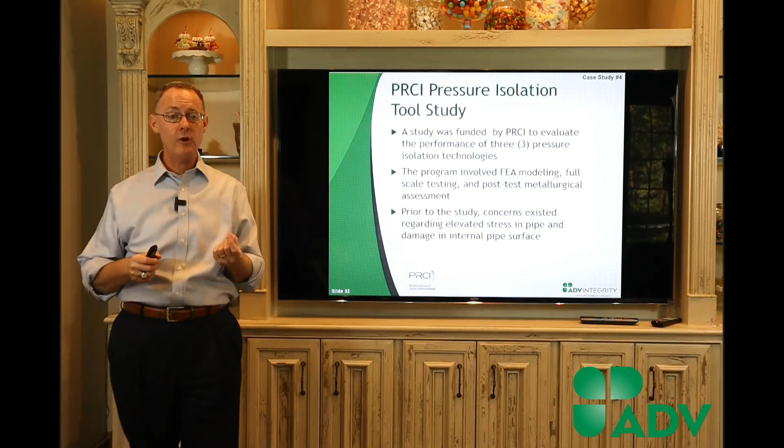One of the concerns onshore was that we would have very high pressures or very high stresses created due to the elevated stresses because we have thin wall. If you've done any offshore pipeline work, offshore pipelines tend to be very, very thick because of the concerns of the compressibility of the deep water environment. Onshore, we tend to have thinner wall, and so these tools come in and they set.

So we built a bunch of FEA models of this. This is kind of a little schematic - you have a high pressure side, a low pressure side. As this tool sets, it expands in place, and it has to lock itself in place so it creates stresses. We've got some images here, and if you've done any FEA, red bad, blue good - it's pretty simple.

And so you've got some areas where you have some elevated stresses, but to me, the thing that was very beneficial in this - and I'll give David a lot of credit - we started off doing FEA models to try to understand it, and we had 3 technology companies who were extremely helpful.

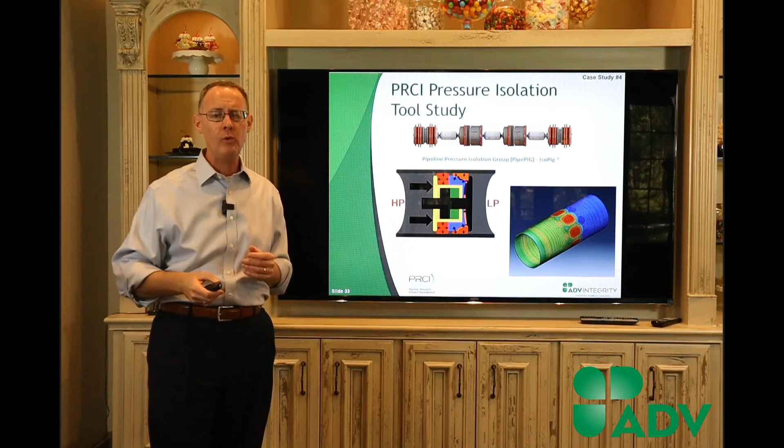We had TDW Stats and PPIG, which is a pipeline pressure isolation group. All 3 of those companies contributed financially, contributed their time, and contributed their expertise. And what we found was the models were actually very accurate relative to what we measure with the strain gauges. So this is one of the isolation tools - we drop it in our test fixture, it locks in place, we pressurize one side, and on the other side we don't want to see pressure. You can see we're putting a lot of strain gauges and measuring it.

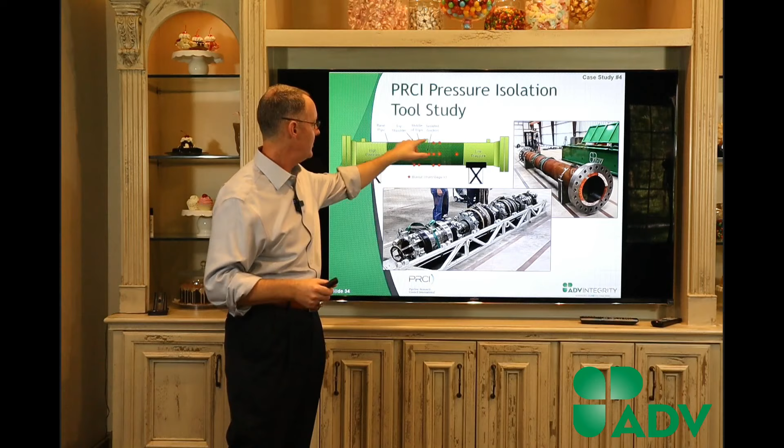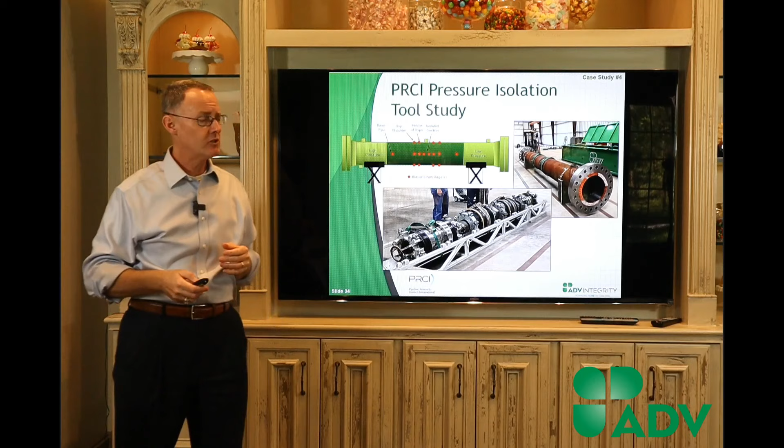And then we eventually went back and sectioned each of those pipes because the concern was possibly creating damage. What we found was there were some superficial marks that were really below the mill tolerance of the pipe. So from my perspective, we could possibly do some additional work, but for lines that don't see a lot of aggressive pressure cycling, I don't think we need to be overly concerned based on the research we've seen. But the beauty in this - there were a lot of questions up front that people had about these technologies, and today we've got the answer because we did the full-scale testing.

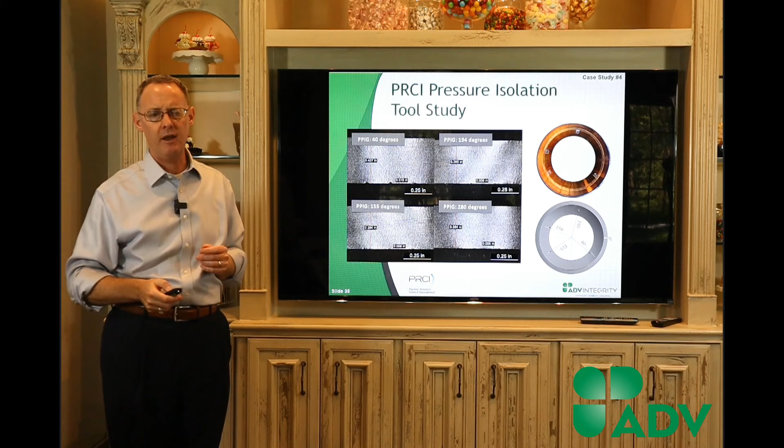And then we eventually took the FEA model, sharpened it a little bit, got the accuracy a little bit better, and we built an Excel tool where now you can go in and say, I've got a larger diameter pipe, can I or can I not use this tool? So we developed a very useful program for PRCI, and once again David was kind of the godfather who provided some guidance for us.

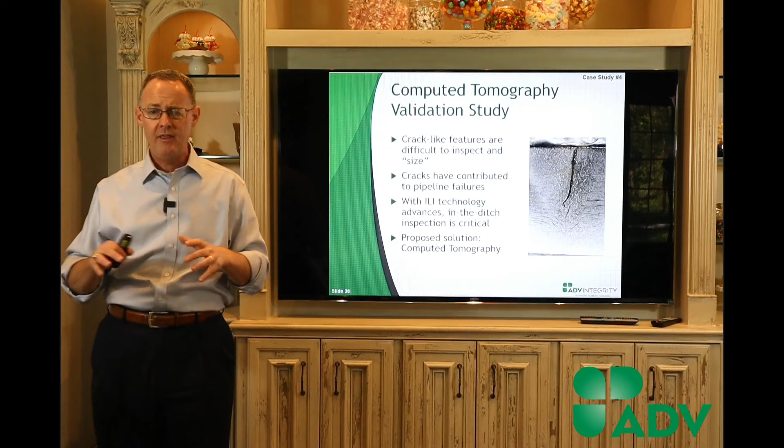So the last thing, let's talk about the CT validation. Cracks continue to be a big area that we're concerned with. These technologies, like pressure isolation and computed tomography, are allowing us to really look at where the technologies are headed.

So kind of wrapping it all up - Wendy's back there telling me I've got about 2 minutes, so I'll wrap up this presentation. I hope it's worked well for you. As I said, the live stream was a little bit of an idea we had earlier this week, and fortunately, due to my very smart daughter, it all came together.

So some closing remarks. Last year I've got a little spreadsheet that has all the companies we did work for - we worked for 43 companies, and as I said, the vast majority of you on the call today are operators. We worked for 15 of you, and we appreciate you working with us. We appreciate your contracts, folks, for not making MSAs overly complicated. Overall, it's just been a great process.

Obviously we started off the presentation today - testing is extremely valuable in terms of helping us face challenging decisions. We've got a couple of projects we're working on right now with you as operators, and there's a lot of pressure that you're under. We just want to come alongside you and use the capabilities we have out in Waller, Texas, to help reduce possibly the stress you have when making these decisions, but also to expose you to some of the things we're doing.

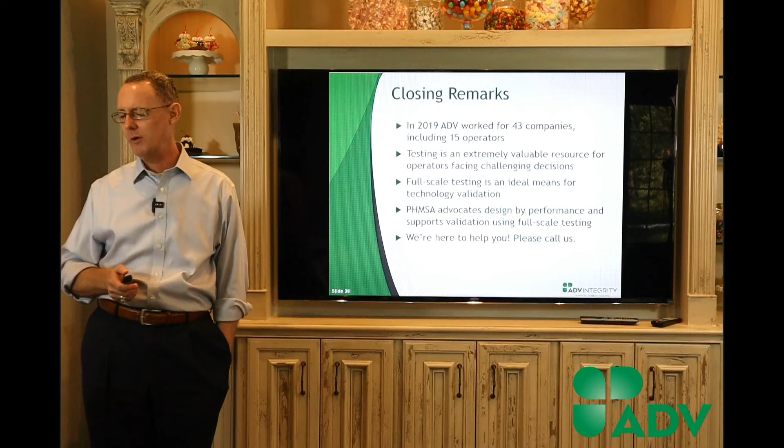And that third bullet is testing validation - about two-thirds of the people we worked with last year were technology companies. And the next to last bullet: we live in a regulated environment, and PHMSA likes performance-based work, and that's exactly what we're doing. So anyway, my last bullet there is give us a call.